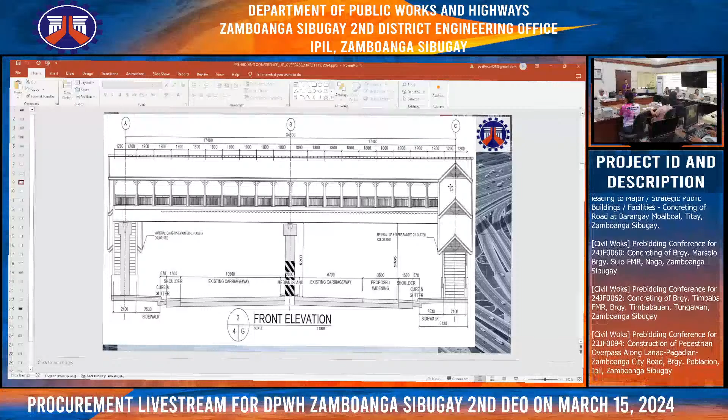Having a pier of one pier only and two abutments. Next slide. This is the side elevation. The column is reinforced concrete, and its girder is I-beam steel. And the trusses are also tubular pipe, rectangular tubular pipe for the roofing.

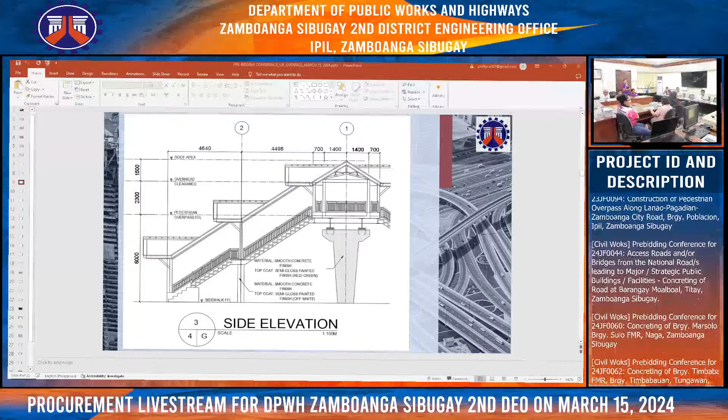Next slide. This is the details for the column. For column 1, the size of its footing is 5 by 5, and the size of its column is 1 meter by 1 meter, and it is tapered going up to the capping. And the clear height is, I think, 4.2 meters for the capping.

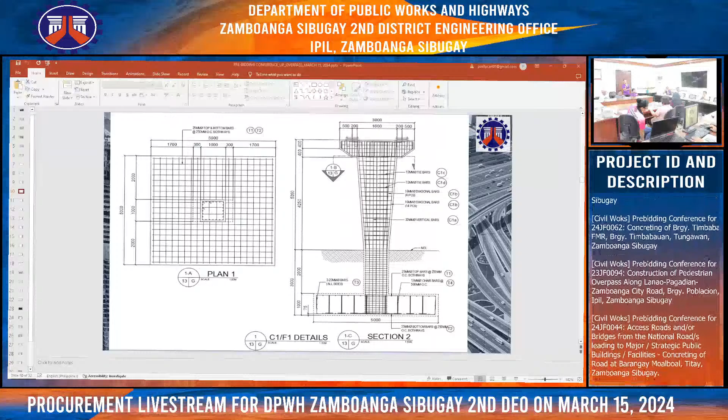Next slide. This is the detail of the capping. Main reinforcement is 25 mm. This is also the detail for its bearing pad, and it will be anchored at the capping and bolted to the steel I-beam for its girder.

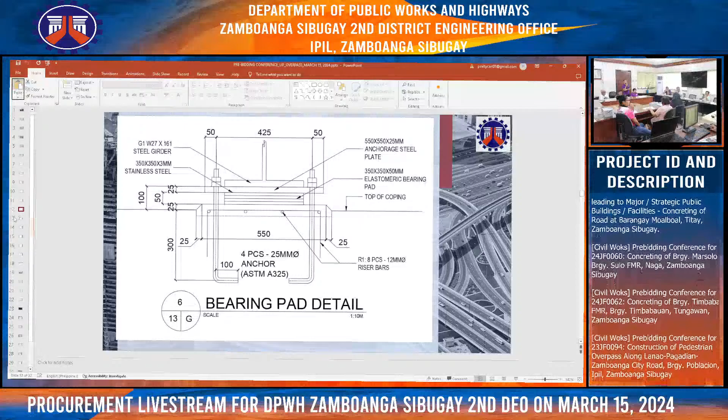Next slide. Another details for the columns. Next slide. This is the cross-section of each column. The main column is 1 meter by 1 meter, and the other columns are smaller.

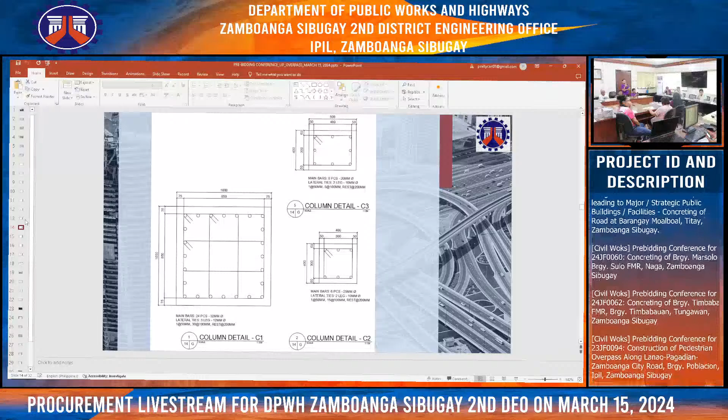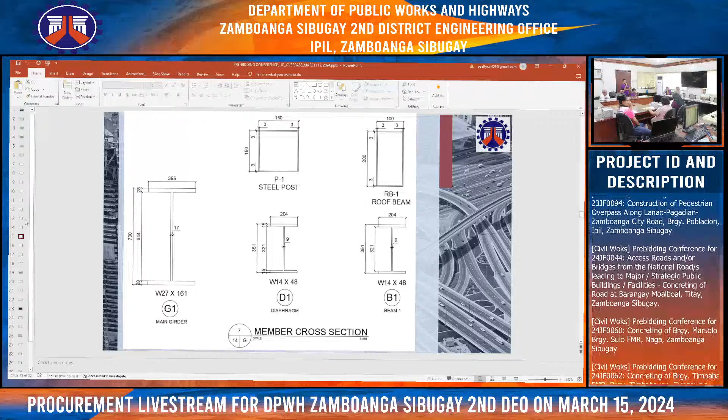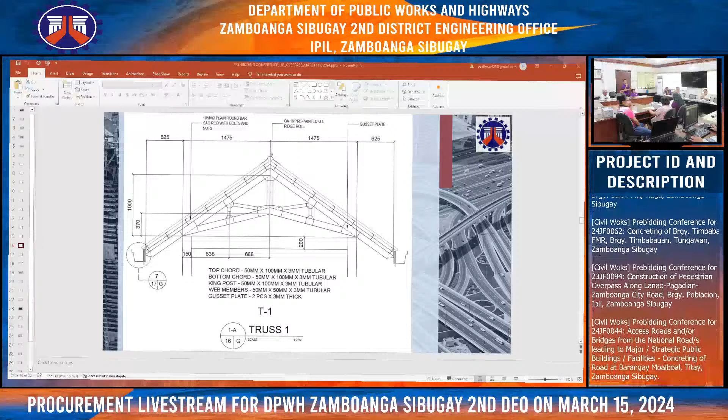Next slide. For the cross-section of the main girders, the depth of the main girders is, I think, 0.7. And for the truss, its members are all rectangular, rectangular tubular pipe. Next slide.

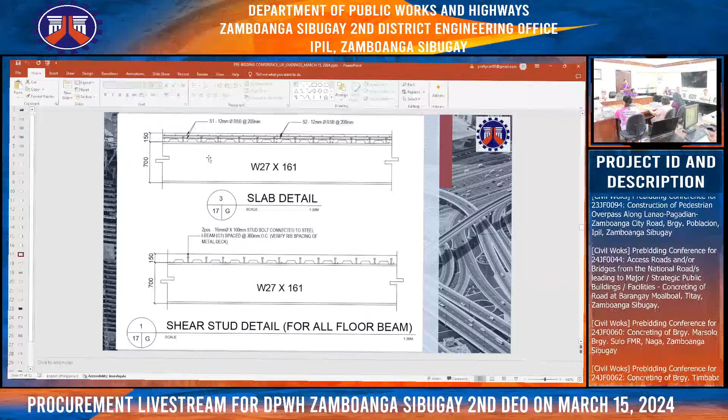Next slide. For the typical road section, item 200 is 0.30 at the proposed widening, and the thickness of the proposed widening is 0.28 meters for the PCCP, and for the sidewalk 0.1 meters, and for the thickness of the shoulder is 0.2 meters.

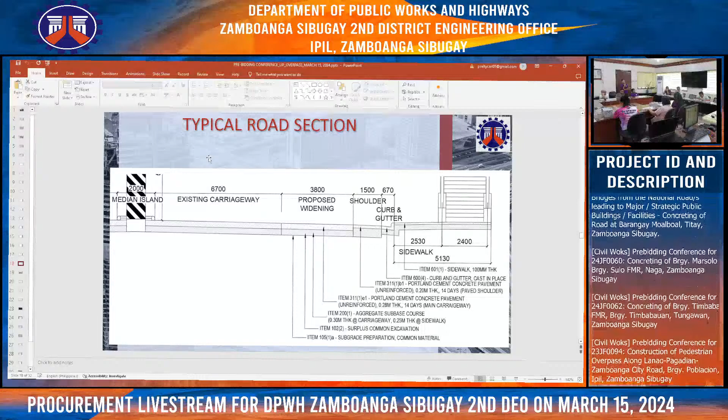Next slide. This is the proposed perspective for the proposed overpass. Next slide.

For the items involved and summary of quantities... For part A, provision of field office for the engineers, okay?

And provision of progress photographs. For part B: permits and clearances, bridge survey and staking, project billboards, occupational safety and health, traffic management, and mobilization and demobilization. For earthworks, this is for the proposed additional widening, which is 3.8 meters width.

And for the surface course, 0.2 meters thickness for the paved shoulder and 0.28 for the main carriageway widening.

For the bridge construction: metal railings for the overpass, and structural steel furnished, fabricated and erected for the main girders and the diaphragm, bolts, nuts, and washers, reinforcing steel grade 40 and 60. Grade 40 for 16mm and below, and grade 60 for reinforcing steel greater than 16mm.

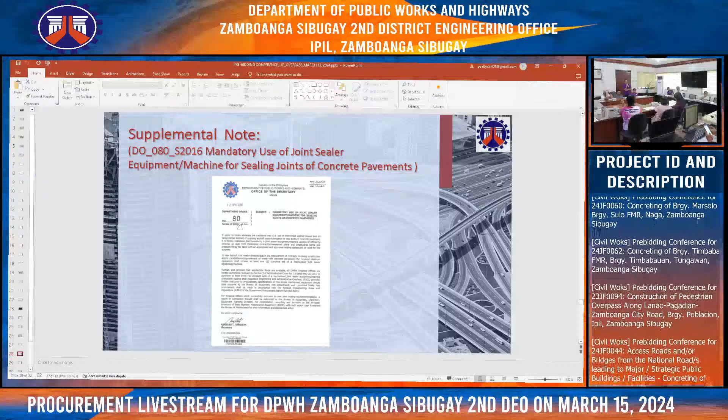That will be all. And if you have questions or clarification, you can visit me at the planning and design section, with my number on the screen.

There are questions you may ask now. Is there any question from the contractor?

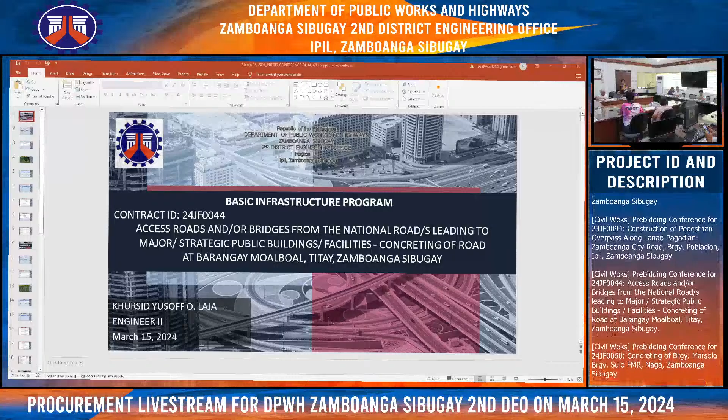The appropriation is 5 million and has a project duration of 40 calendar days, and has an approved budget for the contract of 4,950,000. The funding source is from the FY 2024 infrastructure program.

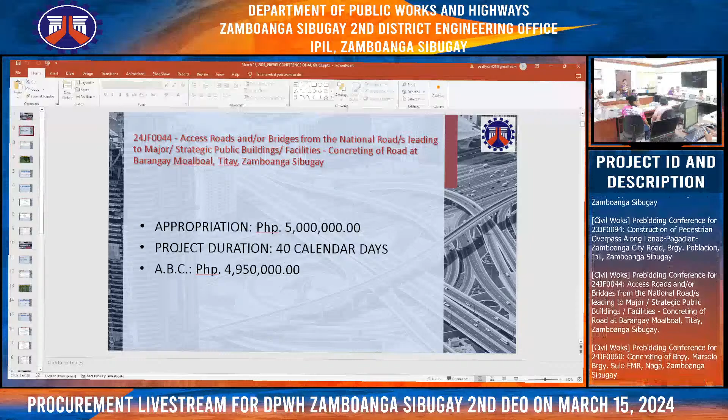The project location is Barangay Moalboal, Titay, Zamboanga Sibugay. It's a continuation of the existing PCCP road.

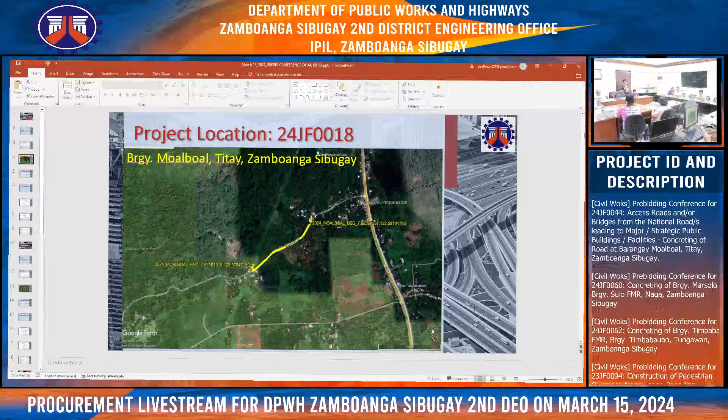Has a license category of C&D, size range of Small B. The project limits: beginning station is 0 plus 00 and end station of 0 plus 350.00, and has a total length of 350 meters. The width of the PCCP is 5 meters and the thickness is 0.20 meters.

We propose RCPC 910mm diameter for a certain station.

For the items involved, summaries of quantities. Part A, facilities for the engineer. Part B, other general requirements. Part C, earthworks: individual removal of trees, surplus common excavation, pipe culverts and drain excavation, embankment from the roadway, structure excavation, and subgrade preparation.

For our sub-base and base course, we used item 200, aggregate sub-base course. For our surface course, Part E, 311 1B1, Portland cement concrete pavement, 0.20 meters thick. For part G, drainage and slope protection, we use pipe culverts 910 mm diameter and stone masonry for the head walls and the aprons.

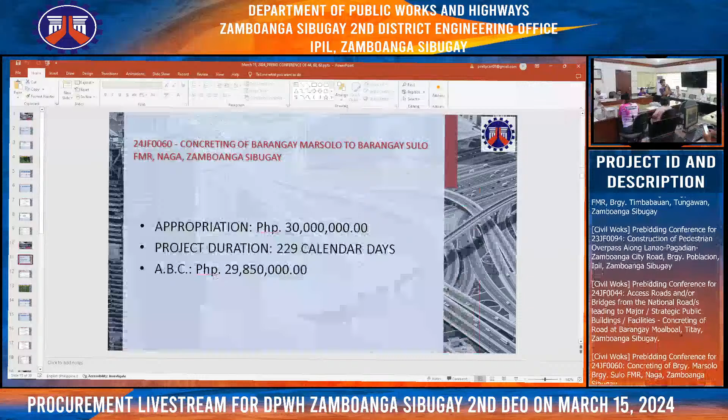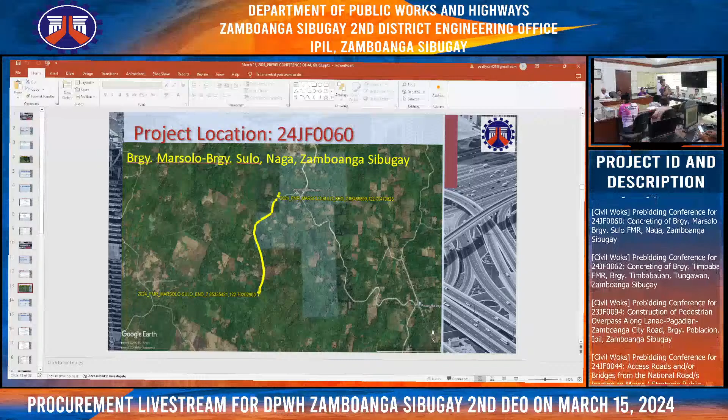The project location is at Barangay Marsolo to Barangay Sulo, Naga, Zamboanga Sibugay. This is a continuation of the existing PCCP.

License category of B, size range of medium A. The beginning station is 0 plus 00 and end station 1 plus 560, with a total length of 1,560 meters, a width of 5 meters, and a thickness of 0.20 meters.

The typical roadway section, the thickness of item 311 is 0.20, and for certain stations we propose a lined canal, V canal, stone masonry.

For the slope protection, we propose grouted riprap. For our drainage, we propose 910 mm diameter pipe culverts and RCBC, reinforced concrete box culvert.

For the items involved, summary of quantities. Part A, facilities for the engineer. Part B, other general requirements. Part C, earthworks, including clearing and grubbing.

For individual removal of trees, removal of actual structures, surplus excavation, structure excavation, pipe culvert and drain excavation, embankment from roadway and structure excavation, and subgrade preparation.

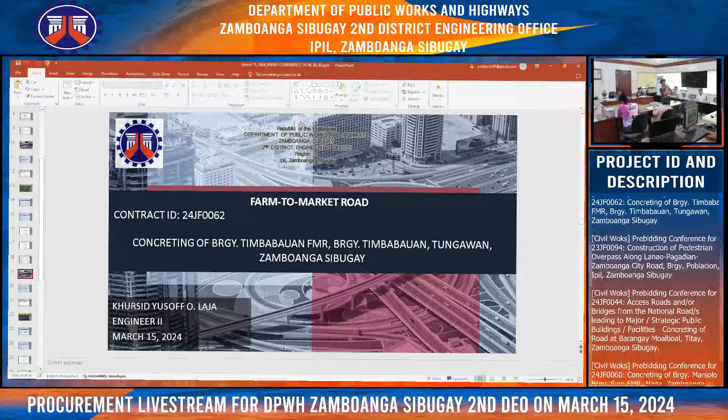For our third project, under Farm to Market Road, with contract ID 24JF0062, Concreting of Barangay Timbabauan FMR, Barangay Timbabauan, Tungawan, Zamboanga Sibugay.

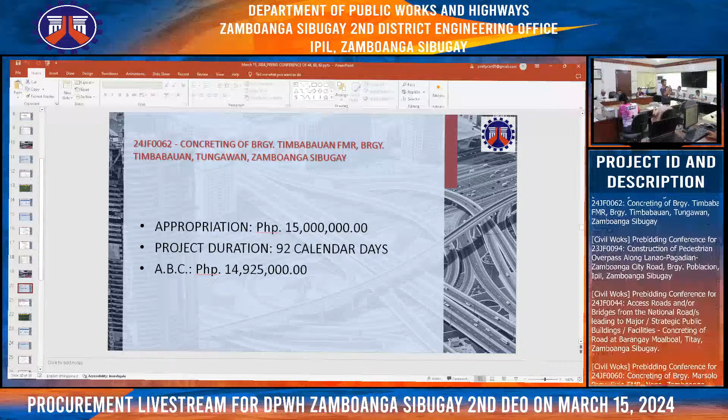It has an appropriation of 15 million, project duration of 92 calendar days, and an approved budget for the contract of 14,925,000. The funding source is sub-allotment advice with number SR 2024-02-01-0142.

The project location is at Barangay Timbabauan, Tungawan, Zamboanga Sibugay. This is also a continuation of the existing PCCP.

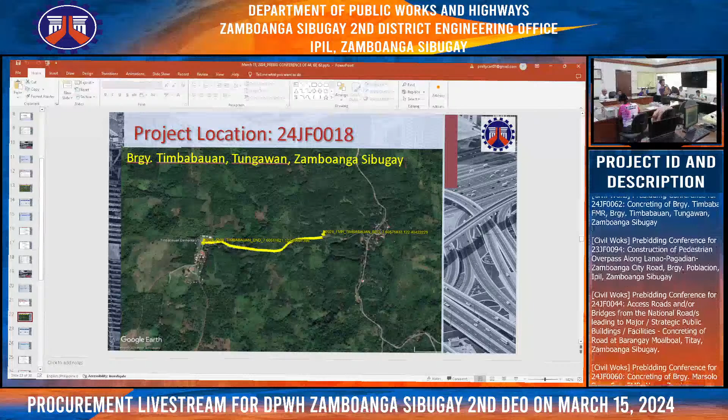For the license category, it is C & D and size range of small B.

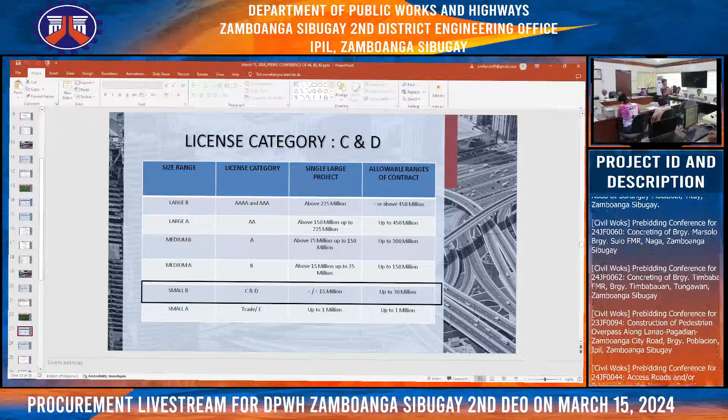The beginning station is 0 plus 00 and it ends at 0 plus 870, with a total length of 870 meters, a width of 5 meters, and a thickness of 0.20 for item 311.

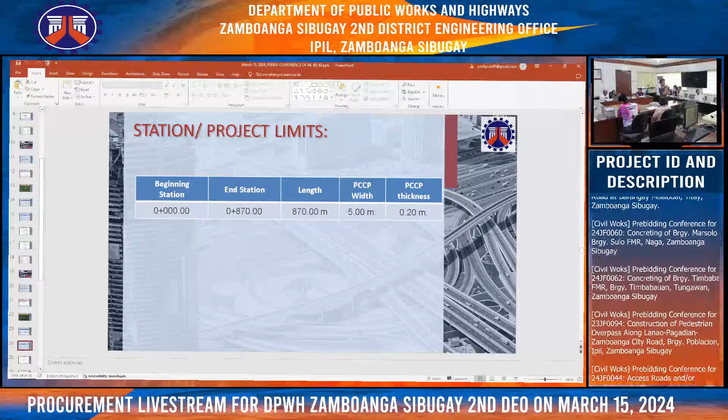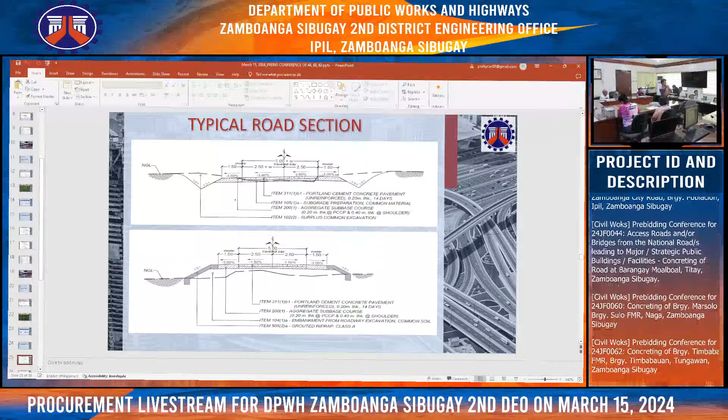The typical roadway section, item 311 is 0.20 meters thick, and we propose a grouted riprap for the slope protection.

For our drainage, we propose 910 mm diameter pipe culverts, and in a certain station we use 1,220 mm diameter pipe culverts.

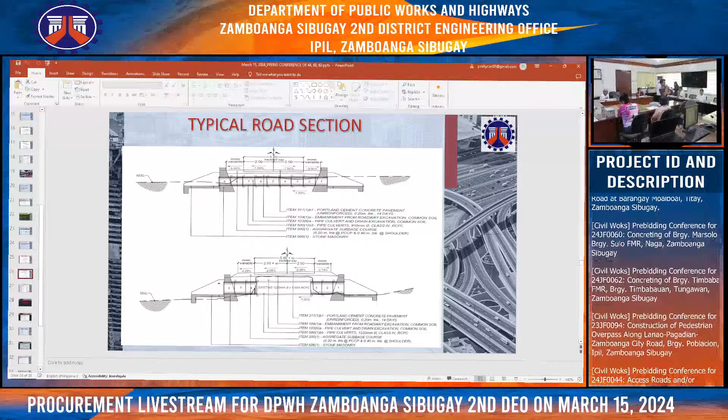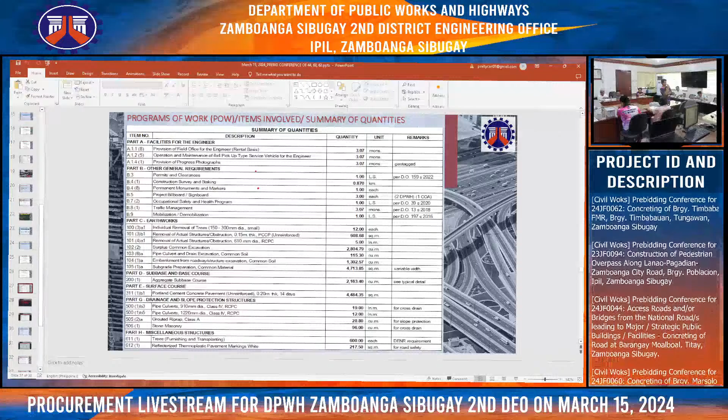The summary of quantities: for part A, facilities for the engineer, other general requirements. For part C, earthworks, we have individual removal of trees, removal of actual structure, 0.15 thick PCCP, removal of actual structure, 610 mm diameter RCPC, surplus common excavation, pipe culverts and drain excavation, embankment from the roadway, structure excavation, and subgrade preparation.

For the sub-base course, we use item 200, aggregate sub-base course. For the surface course, we use item 311 1B1, Portland cement concrete pavement, 0.20 meters. For drainage, we use pipe culverts 910 mm diameter and 1,220 diameter RCPC. For slope protection, we use grouted riprap and stone masonry.

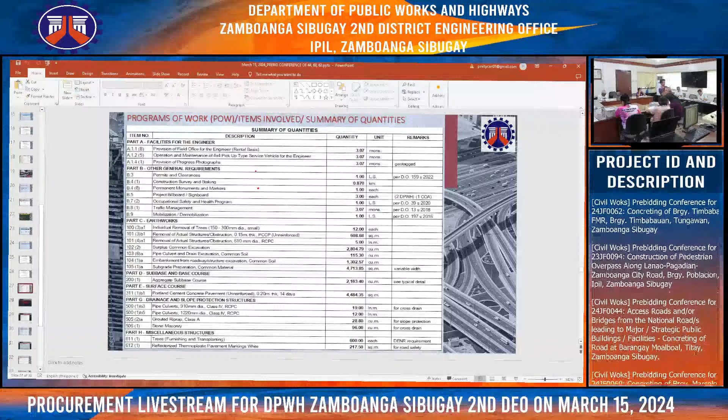For road safety, we use pavement markings. Next, for the department orders associated in the program: material source map, minimum equipment requirement, and manpower requirement.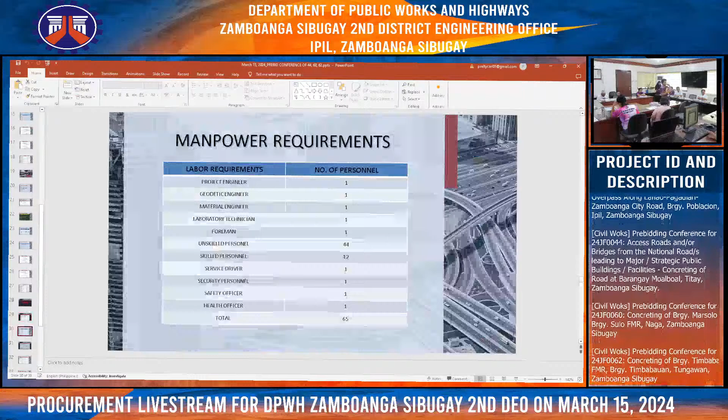For the material source map, we utilize the Palumok quarry for our item 200, and Kabasalan quarry for the fine and coarse aggregates.

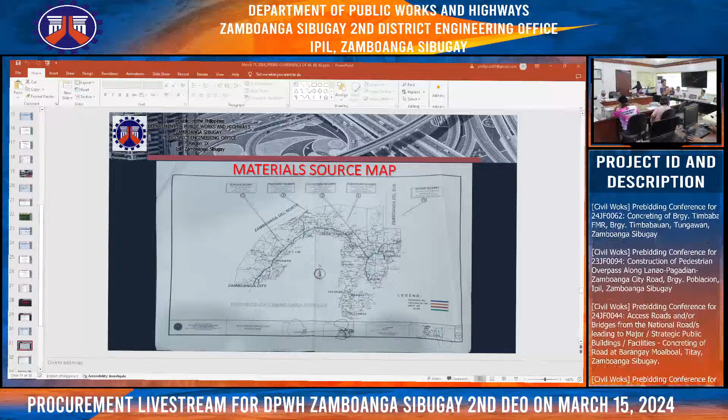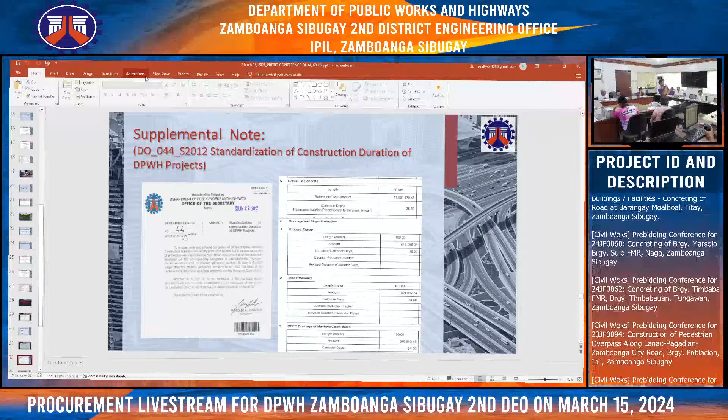Supplemental notes is under Department Order 044, series of 2012, standardization of construction duration of the DPWH projects.

For supplemental notes, Department Order 80 series of 2016, mandatory use of joint sealer equipment machine for sealing joints of the concrete. This is used for road projects.

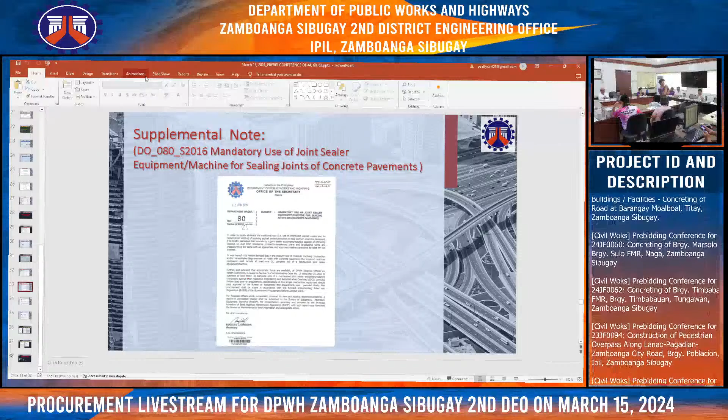For the permits and clearances, we have Department Order 159, the implementation of the social and environmental management system operations manual.

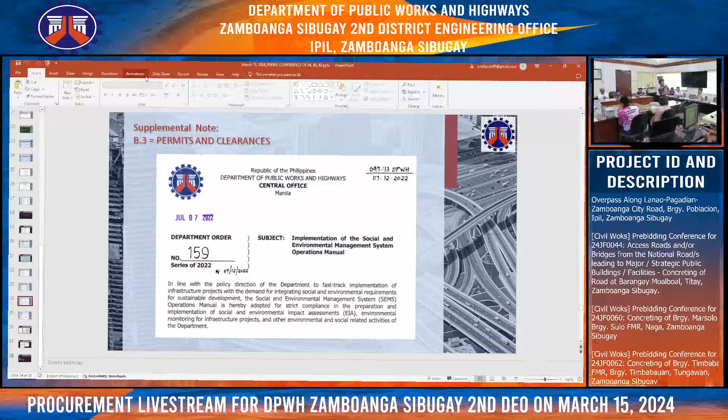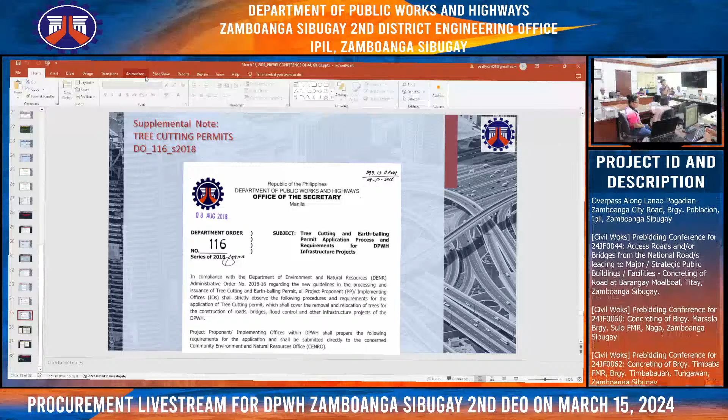For the tree cutting permits, we have Department Order number 116, series of 2018, tree cutting and earth balling permit application process and requirements for the DPWH infrastructure projects.

For the gender mainstreaming effort of the Zamboanga Sibugay Second DEO, we have Department Order number 130, series of 2016. This is a guideline for the implementation of the provisions of Republic Act number 6685 and Republic Act number 9710, or the Magna Carta for Women.

That's all. For questions and clarification, please see Engineer Yusuf Olaja at the Planning and Design section. That concludes my presentation.

Is there any question?